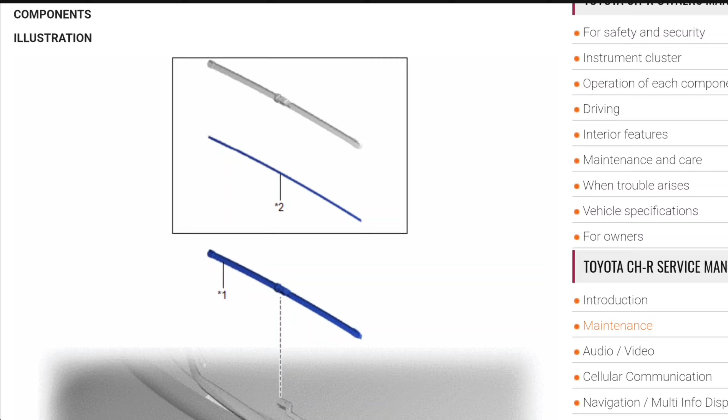And these are the instructions on how to install the wiper blades according to the manual.

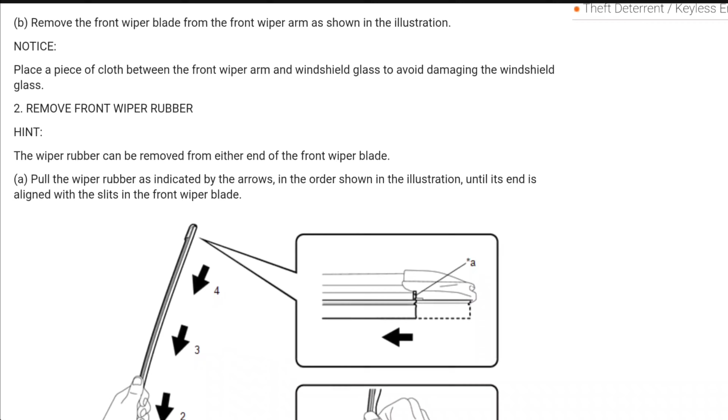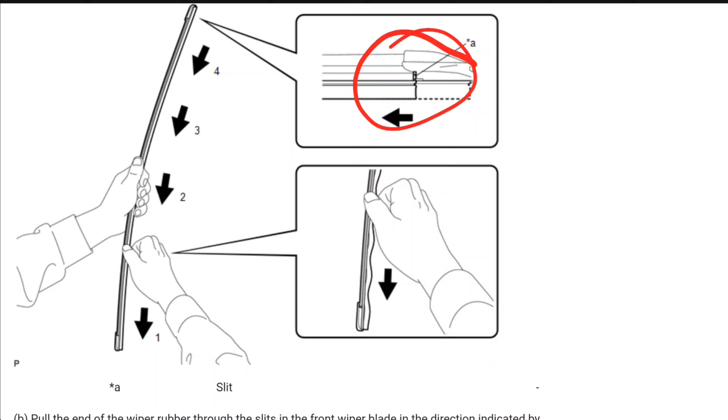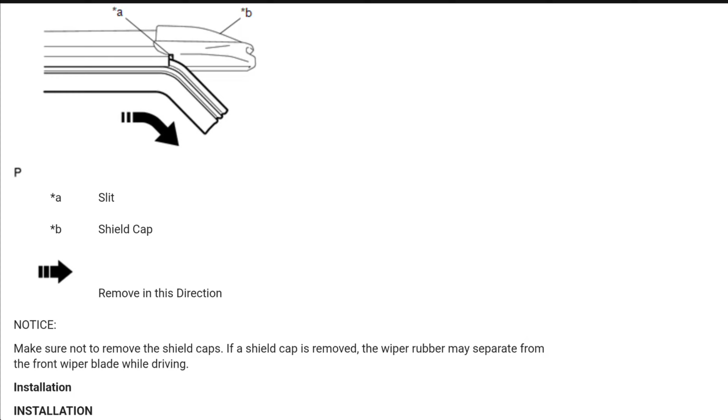So the way that this works is that you have to focus right here on this area, because that's where it's going to slide out from. Once you have it out like this, this is where you're gonna start pulling, and it should slide out.

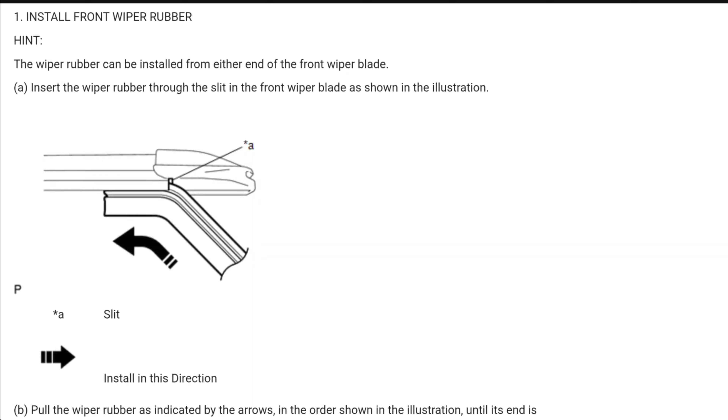You see, you slide it in the same way you took it out.

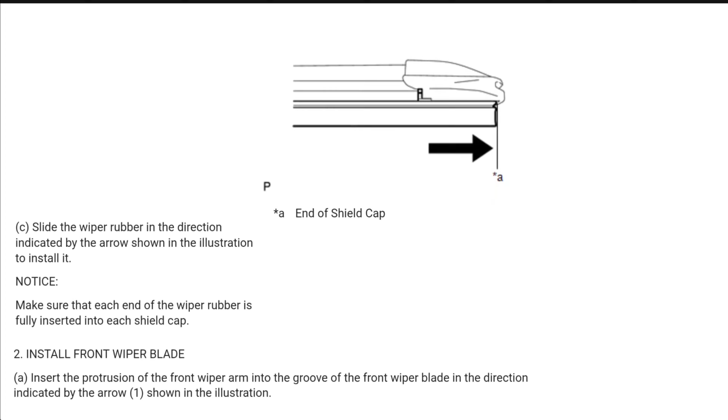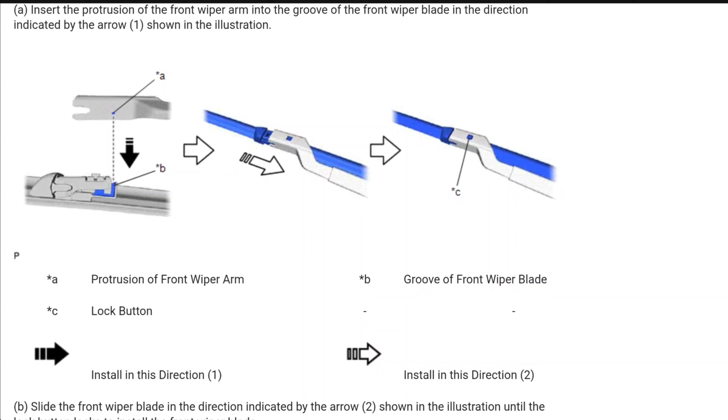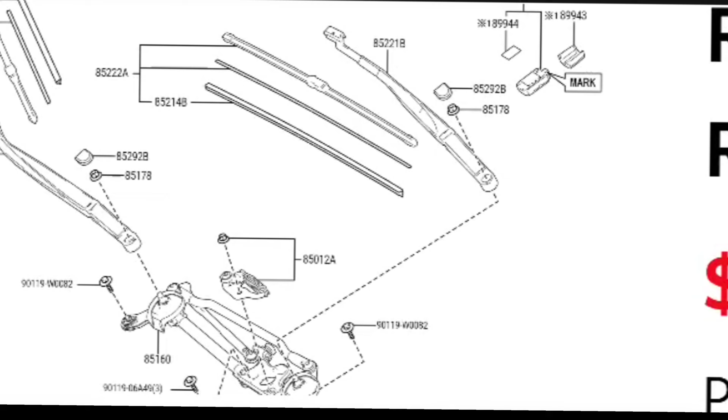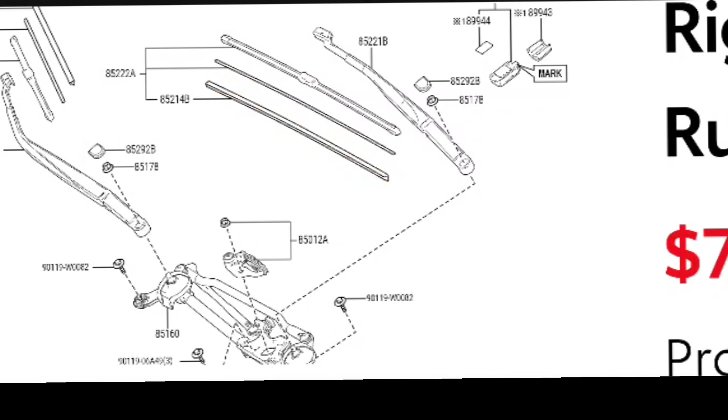It's this part number right there, because I only want to buy this, and that is what that rubber insert is.

When you order parts from dealers like this, you order a couple, not just one. It's always good to have an extra one, and you can even have them inside the trunk of your car in case you ever need them. They're small, you can put them anywhere.

You see here they're selling the full blade. I mean, the original wipers are not that expensive, and I'm telling you, they work great. I love them.

And these are the eBay prices. You want to make sure that you always look at the connection, and it has to look the same as the ones that you have on, or similar.

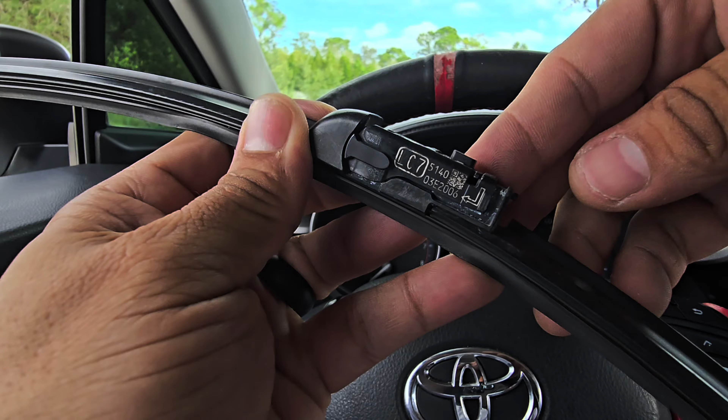A few moments later: I'll show you the mechanism up close. So it works like this.

Now I've seen aftermarkets and they don't lift up like this, but remember, this is the guide right here. And it even has arrows right there, you see, to the left and to the right, telling you those are the guides. You got your button right here. I mean, if this breaks, that's it, it's gone, throw it in the trash. But if it's still good, like this, I still reuse it.

Now this is the one that I told you I bought new. Look, I have this like 6 months ago, but then again, I always wipe them, they're not dirty all the time. Most of the time I wipe them off with an alcohol wipe at least twice a week. So I keep them clean, but that doesn't mean the sun and the dryness and the rain is not gonna mess them up. I'm about to run an inspection on this one because I'm about to order more.

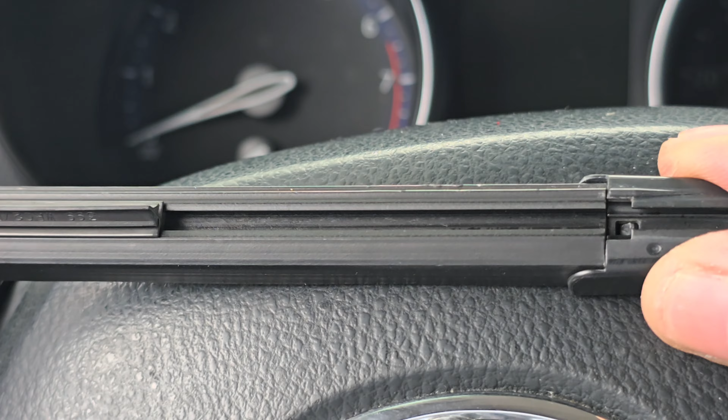That's the railing, you see? This is the other side. So when you put it back inside, this is where we're gonna be sliding on.

Slides easy once it's inside, and just don't pull from one side. Try to take your time and push it and pull it. Both hands will work out better. I pull from here and try to guide it from here, not push. I just guide it, and then I just start pulling.

And you want to make sure that you're inside here. Same thing it would have been for this side if I would have been taking it out from here. You see, it just slides out. Same way it's gonna slide back in, and at the end you just want it to be right there, all the way to the end. You see how it didn't go all the way to the end? That's because I haven't pushed it all the way back.

So what's happening here is that it's still there. Okay, so you want to be pulling a little bit from here, and as it goes inside, you see, now you just pull and it goes back inside.

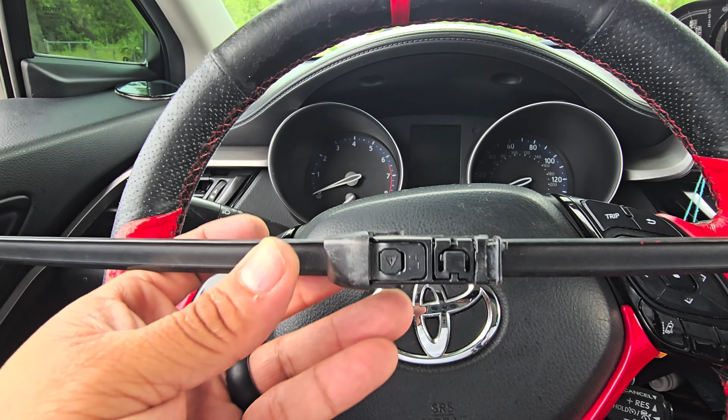Don't forget to also paint them. Once you take this out, you can spray paint them. Try not to put spray paint here because this is where it slides, so try not to put too much. You can put a tape here if you want. You don't want to be grinding off the paint and then it's just gonna fall off. You can put a piece of tape here just to cover this piece right here, because the areas you want to paint is here, here, here, all this to the end, all this.

And remember, when you paint this, don't do it with the rubber on, okay? Make sure that when you take this off, you grab a black spray paint and just spray it all over. Not too much, just enough to cover. You don't have to do it too much. Let it dry. It should dry for 30 minutes to 1 hour to be sure.

And whenever you put it back on, you don't want many fingerprints on the paint. So try not to put too much pressure on it if it's recently painted, because you're gonna see your fingerprints on it. You could leave your fingerprints on it. So remember, put the tape here and spray paint all the way, all over.

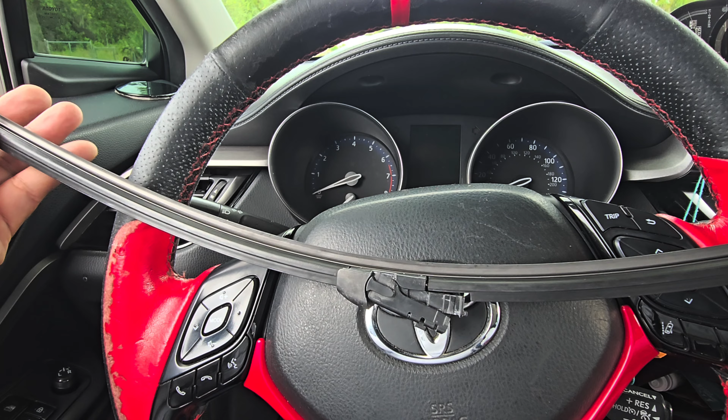And after an hour or so, well, you can leave it overnight, and in the morning you just slide the wiper blade back on, and it should work fine.

Now there is the option of just buying new ones, of course, but I'm gonna tell you something, these ones, they worked out great. That's why I do it.